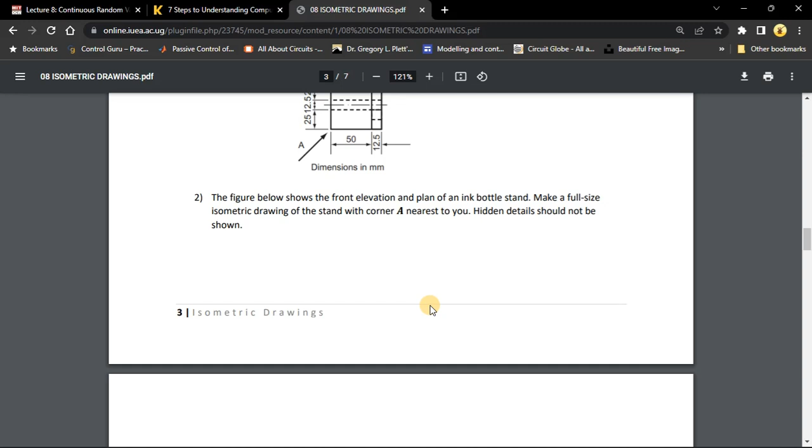This is it. It's of an ink bottle stand. It's given in orthographic projection, and we are required to draw an isometric view of it, or an isometric drawing, with corner A nearest to you. So meaning wherever we have the intersection of the axes, that is where we should put corner A.

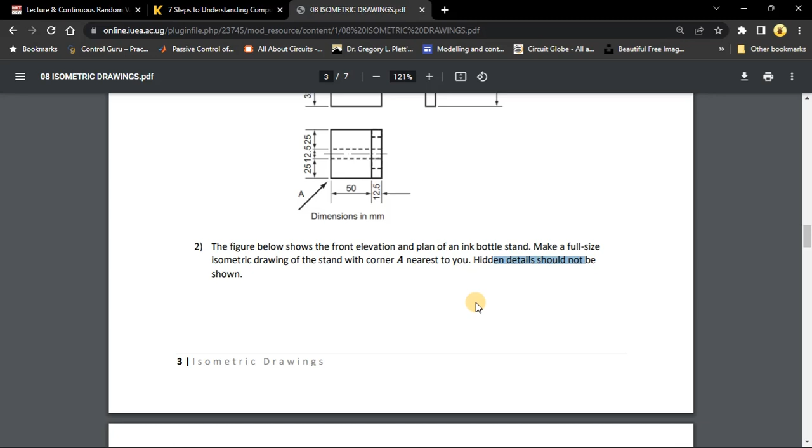Also, hidden details are not required in this part. So yeah, this is just slightly complicated from what we've previously seen, but let me show you how to do it.

So we'll go over to AutoCAD, and before we do that, we have to first observe the maximum length.

Well, the method I'm using here is what's normally called the box method, not the offset method. With offset, you would start off side by side until you complete the whole drawing. With the box method, you start off with a box and then start cutting off parts which are not required, and whatever remains is the required object.

So with the box method, you make sure the box, or cuboid, or cube, or whichever shape the object fits in, has the maximum length of the object and the maximum height of the object, which is 38 here, and the maximum width, which is 80. So we're going to construct a cuboid first with these dimensions. It should be 110 by 38 by 80.

Okay, so let's go over to AutoCAD, and make sure you're working in the isoplane.

If you don't remember how to do that, you just click here. You should be able to see isometric drafting. It should be ticked. If it's not ticked, tick it so that you're able to see this symbol here. Simply toggle the symbol on or off. If it's off, then you are doing the normal 2D drafting.

If you highlight it, if it's active, it should change color. Mine shows red and green. If you want to switch between the planes, you can press F5 to change plane. So that is the top plane, this is the right plane. So left, top, right, or you can still change planes from here.

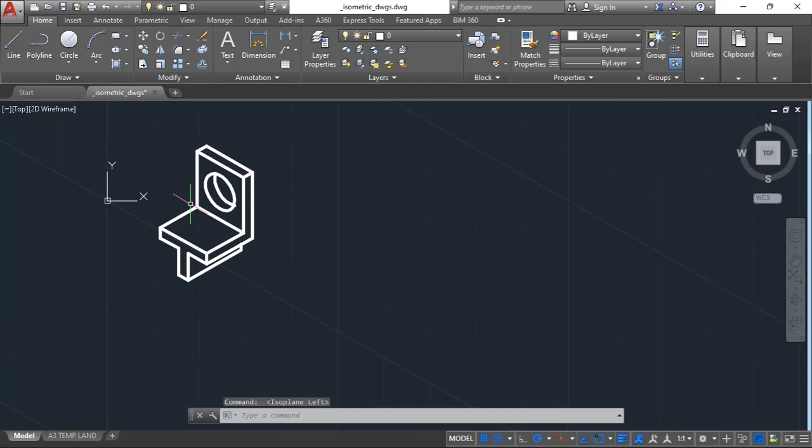Okay, so I'm starting with the left plane. I normally start with a line from here, then there, then the one that comes vertically downwards. So maybe before I continue, let me move this away from our UCS, the coordinate system. Just move it some other place.

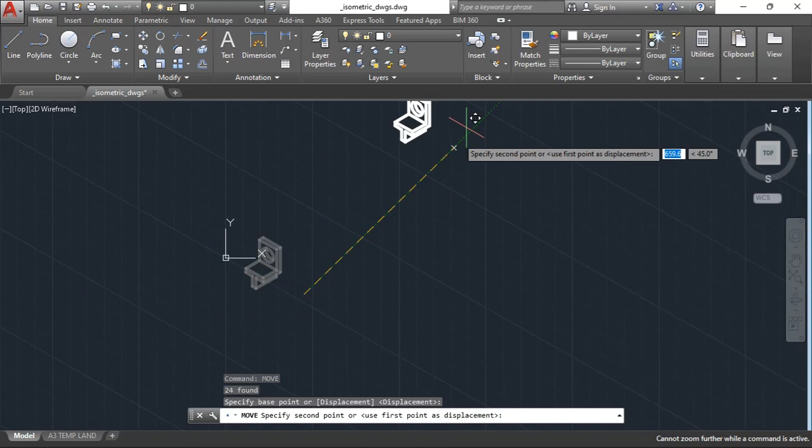So I'll put it - it doesn't really want to be moved so far, so I'll just put it here, and I'll draw the next object over here.

So we'll start off with the width, which should be on the left. So that is 80 on the left. Then on the right we should have 110. Then upwards we should have 38. I'll draw something like this - the angle should be 330 or 30 degrees to the horizontal, depending on how you are counting your angle, because mine are counterclockwise.

So if yours are clockwise, then you should be able to show - I'm not really sure, but you should find a way to count those angles.

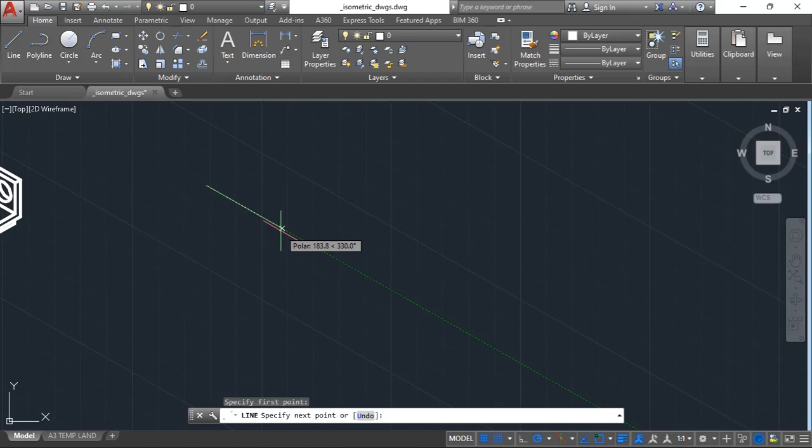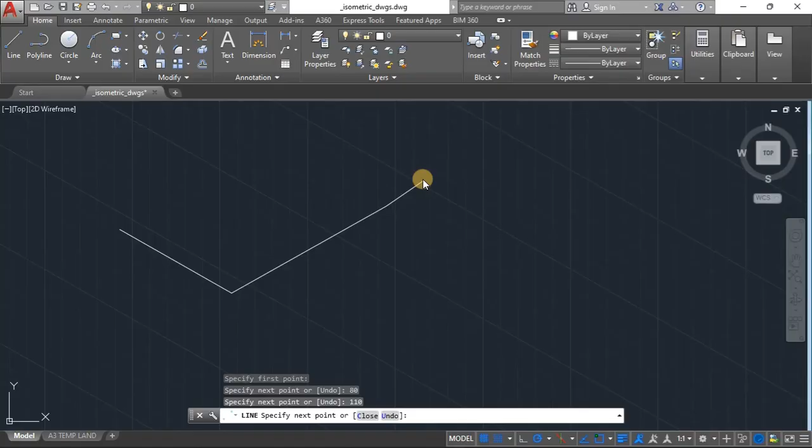Okay, so I'm going to type 80, so that's 80, and this side at 30 degrees we need 110. So make sure that angle is 30 degrees, type 110. Yeah, that's 110. Then vertically upwards.

Okay, you notice I've not started with the axes, because it's not really important. What's important is knowing the directions. So vertically upwards, I'm doing 38.

Then I'll come back here, same angle, it should be - okay, I'm trying to track that angle, so make it 180 plus 30, that should be your angle if you're counting counterclockwise. If you're counting clockwise, I'm not really sure what it will show you, but you can still make that calculation. So 180 plus 30 should give us 210.

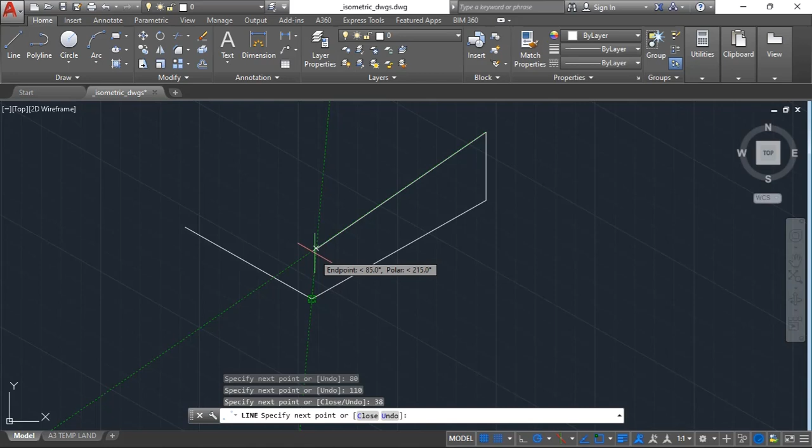That's what I'm having here. So instead of typing 110 again, I'm going to simply track that point. But I have to make sure they meet at 210 and 90 degrees. So you make sure you're looking at 90 degrees and 210. You can click and click.

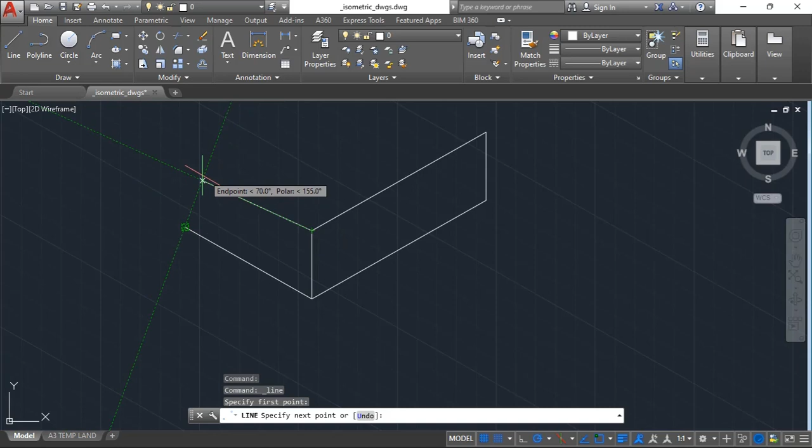Then I'll go leftwards at 150, and same thing, I'll just track this point. I don't need to type the distances anymore. So I should have 90 and 150. Click, also click.

Okay, now we are left with only 2 lines, and that box is finished. So I need to go this side at 30 degrees and then also track that point. So I'll track that point, that end point.

Okay, so this angle should be 30 and the other angle should be 150. So look for the intersection of 30 and 150, which is over there. So when you see that point, you can click. I know this is very tricky, so you have to be very careful.

Alternatively, you can just type the distances, but I'm not doing that. So I'm looking for that end point. If you missed the previous video, whatever is helping me track all those angles is this setting.

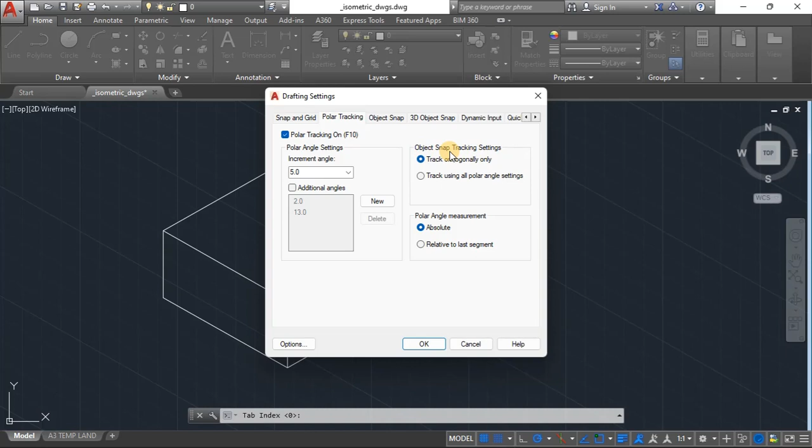Okay, I need to check, it's under tracking settings. So it's by default set to track object snap tracking settings. Under that subsection you should have track orthogonally only, but I want to track using all polar angle settings.

So all angles I should be able to track in whichever direction. That's what I'm doing. Otherwise, if it's only orthogonally, then you're only able to track the vertical lines and the horizontal lines. But now we've included all polar angles.

So now we are done with the box. Now let's cut out whatever we don't need. We should have 60 in the middle and 90 in the middle, so this is 60 by 90. That's what we are going to do first. We draw something inside that is 60 by 90.

Okay, so now we're going to do a little bit of math. This is 80 from here to there, so I need to cut off 60. The balance is 20, so 20 divided by 2 is 10. So I'll put 10 on either side.

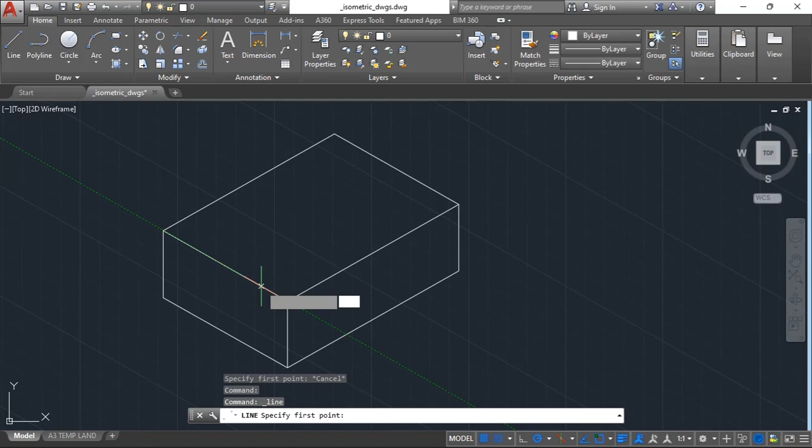So along that point, I should type 10. Oh, I need to select the line tool. Along that point, I'm going to type 10 to get my starting point, and then at 30 degrees distance is 110, but what's most important is the angle, 30 degrees.

So I'll click, and I'll do the same thing here. I'm going to track from this side, or you could as well track from the line we've just drawn, and type 60 to get the starting point, but I'll just simply type 10, then another starting point, then the angle is 30, click. Let me do this very fast because it shouldn't be that hard.

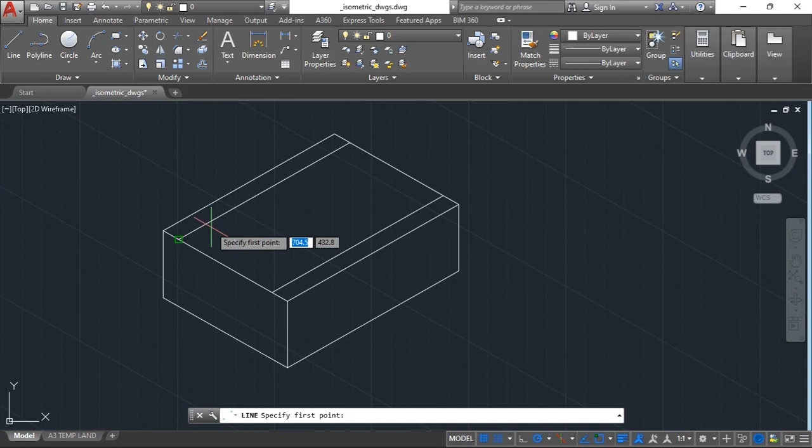And this is 90 and 110, so subtract from 110, we have 20 still, and same thing, 10, 10. So for that I can even just track here.

Okay, I need to hit escape, then start over. So along that line I need 10, then along 330, click, then from that point coming towards here I need 10, so 10 is my starting point, and the angle is 330.

Okay, so now what I have to do is join from that point to somewhere along that line. Let me check that distance. It's supposed to be 18. Okay, so at 18 from here we should be able to join to those points.

So I'll get the line tool, start from here, I'm going upwards. Now because we are tracking all polar angles, that's why it's usually off, so it's very tricky. First deactivate midpoint, and that, and that, and that. Okay, we don't need them at the moment.

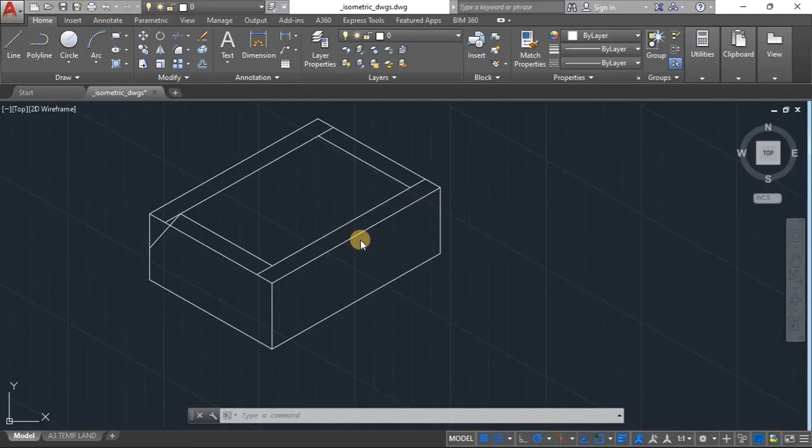So what I'll do, I'll just use the line tool, and I'm not going to have to measure anything. I'll just use the line and draw a line around it, then from that point I'll just connect here. You notice I don't need to measure anymore. Still from that point I'm going to connect a point here.

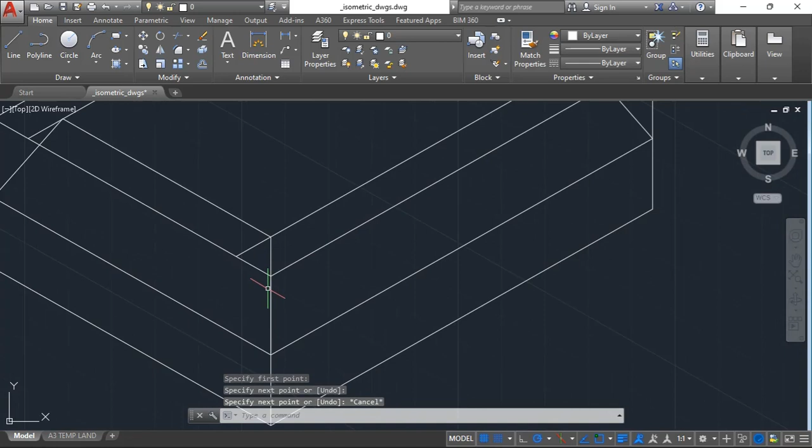Surprisingly it's in line with whatever was already there, so let's leave it at that. Okay, so let me get rid of some lines, whichever lines are not important, let me get rid of them. Okay, so yeah, one more thing, let me trim this, because I'm supposed to draw a circle, so it's better to trim so that I can easily find the midpoint. So trim, and trim.

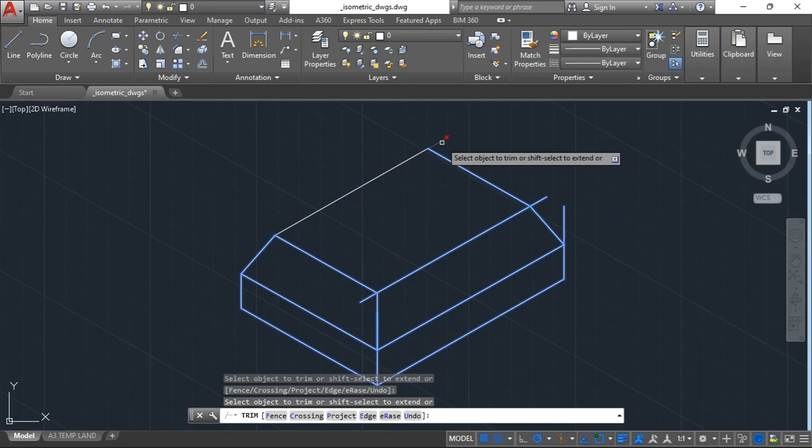And there are too many lines over there, so that one is on top, so I can't see the one behind, so we can leave it like that.

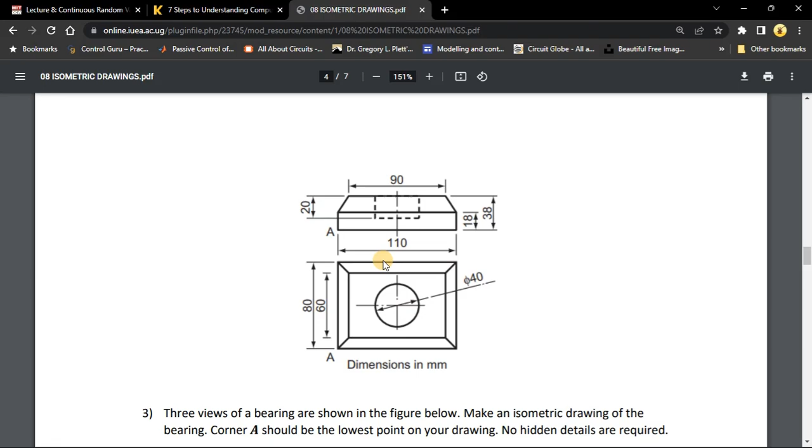Now the other thing is to draw the circle of diameter 40. It should be right in the middle, and the depth of this is 20, only hidden details are not required, but just for this sake I'll include it. So 40, diameter of 40, and right in the middle.

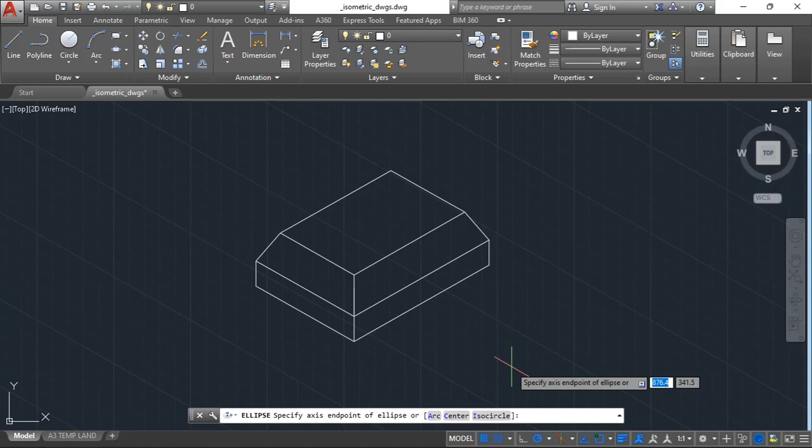So make sure midpoint is activated, and then we are using the previous method, axis end. Okay, so you click there and then choose axis end, creating a sort of an ellipse. Then you have to remember to select iso circle. If you don't, you won't get the kind of circle you want. Alternatively, you can just press I and press enter, so it's an iso circle.

Now select the center, which should be the midpoint of the two points where they intersect with my angles. So one angle should be 330 and the other one should be 210. Well, depending on how you're counting the angles, I'm not really saying it should be 330 and 210.

It all could at some point be 150, depending on how you've chosen your midpoints on the lines, or which lines you've chosen to take the midpoint references. So mine are supposed to meet there, at 330 and 210. So click there.

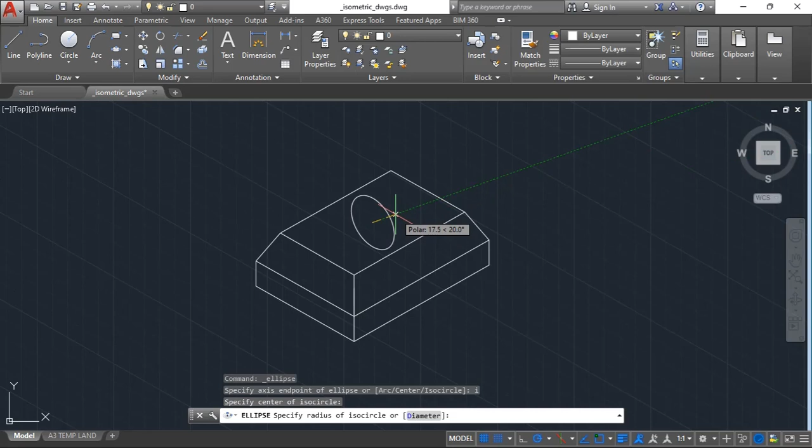Now you notice the circle is not the way it's supposed to be, so for that press F5. You don't have to release it. As it's still active, press F5 to change the plane, as you're drawing it on top, so it should be the top plane. As you can see in the command window, it says isoplane top.

Otherwise we also have right, if you're drawing it on the right plane, but you're drawing it on the top plane. So it has a diameter of, so press D for diameter and then specify the diameter, which is 40. Okay, and you're done. Now I'm going to displace the circle.

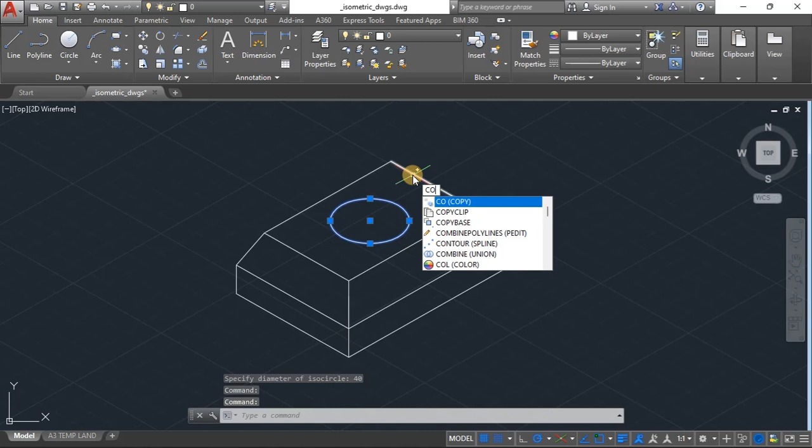To make the hole, I'll just copy and paste a displaced copy downwards 20 millimeters. So make sure you copy. Okay, I need to select, I need to highlight center, and okay, I clicked accidentally, so let me do it again. Copy, and if you point on any point on the circle, that center mark for the circle should be active.

So select it as your base point and make sure you're moving vertically downwards. So just make sure the angle is 270. Well, I have too many angles, so you can always go to polar track settings and change that.

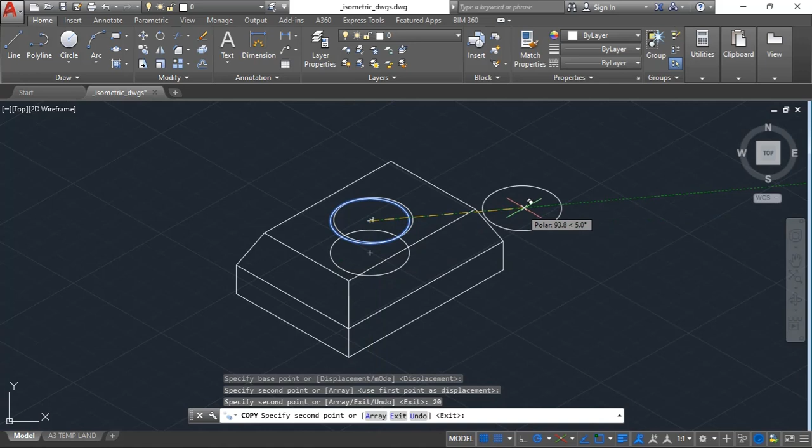So at that angle I'll type 20, and I think I have far too many copies, so I'm not sure which one is which. Let me undo. Okay, let me undo and then copy again.

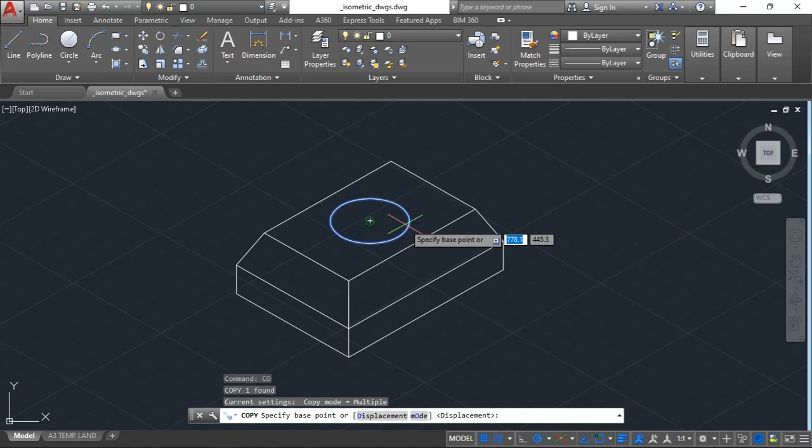So along 270, just type 20. You're displacing it 20 and then escape.

Okay, so this other one should be hidden except for that part over there. There's a part that is visible, so I think we can forget the hidden part, because I thought this part won't be visible.

Okay, but if you're interested in the hidden part, you would have to draw that line to mark the hole, but for that you need to make sure quadrant is active, and then draw a line. Also draw a line like that. Okay, that line will be tangential, only that these circles are kind of deformed, so we use quadrant and not tangent.

Okay, if it was a 2D drawing, then you use tangent instead, but here we are using quadrant. So this would be hidden all the way to that point, and the only way to do that, you would have to trim and then make a fresh copy of the same circle and put it there and then make it hidden.

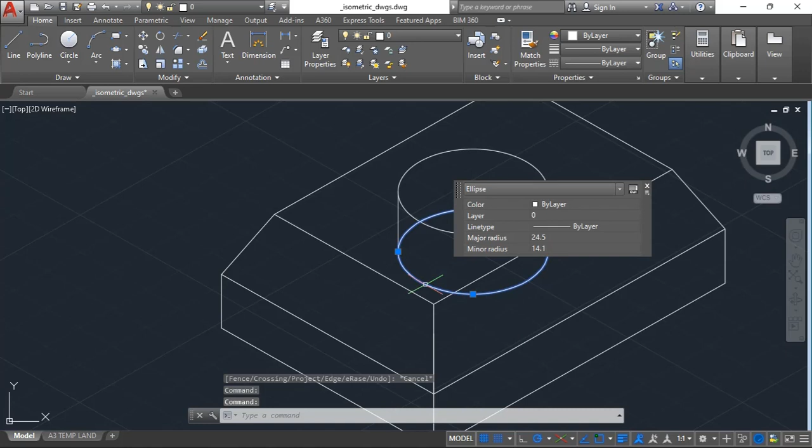It looks like I haven't done anything, but I've actually done something, so let me hide this. That is when you see what I've done. Okay, that is what I've done.

Yeah, I don't want that green part to be visible, so I'm going to have to trim it as well. So before I do that, let me move this a little bit upwards so that I trim the green part. Okay, so yeah, that's why usually hidden details are not required. I'm trimming instead.

So I want to move that one, so let me just move. I'll select just the center, so I'll move it vertically upwards. A distance of 10 is enough. Then I'll move it back 10. Then I'm going to trim again.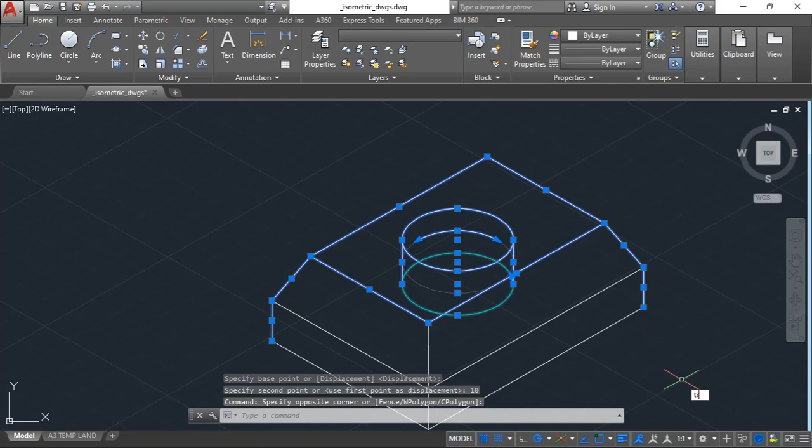So I want to trim off that. Okay. Now I have to move this back down. So type MOV and specify I'm moving the center. So it should be 270, so type 10. Okay, so I've moved it back.

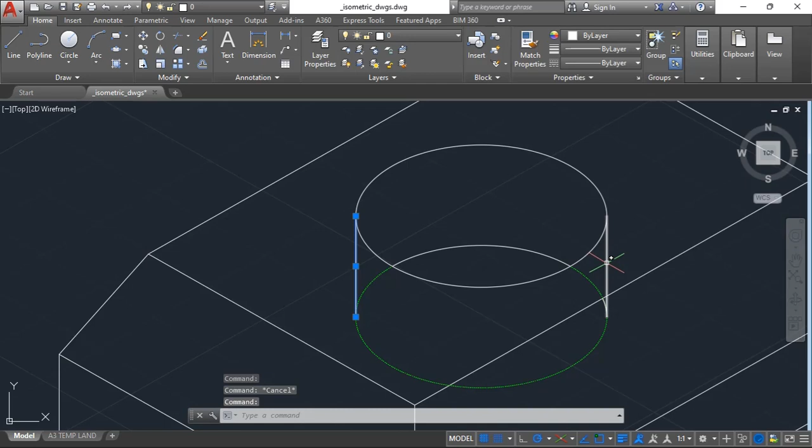Also make these ones hidden. There's a white part there, we don't need it. Okay, so yeah, that is our drawing.

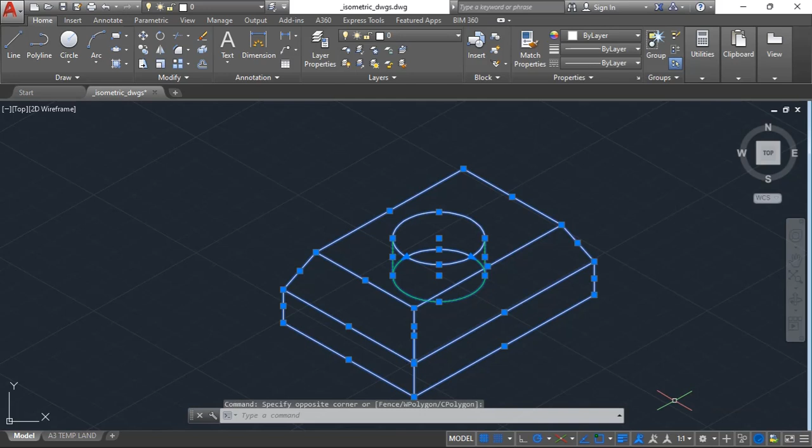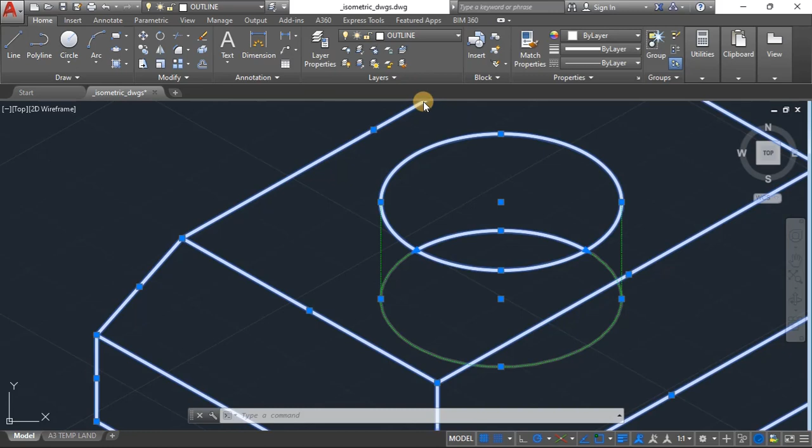Only that, okay, I'm going to make everything an outline, so hold shift and deselect what you don't want outlined. Okay, so I don't want that outlined, I want everything else outlined. Right, so that is what it's supposed to be. There's another white dot here.

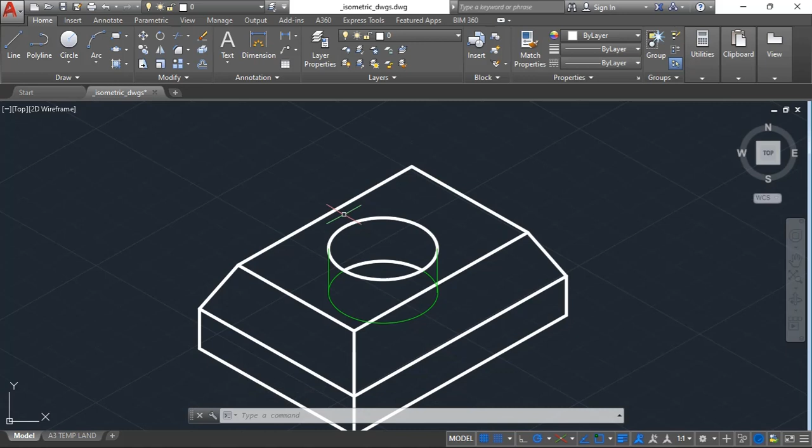Okay, so now that's our object. And of course if we are to do all hidden details, these are the lines, but I'm only doing the one that goes down, that depression or the hole. That's the only thing I want to show hidden. Okay, so yeah, that's it.